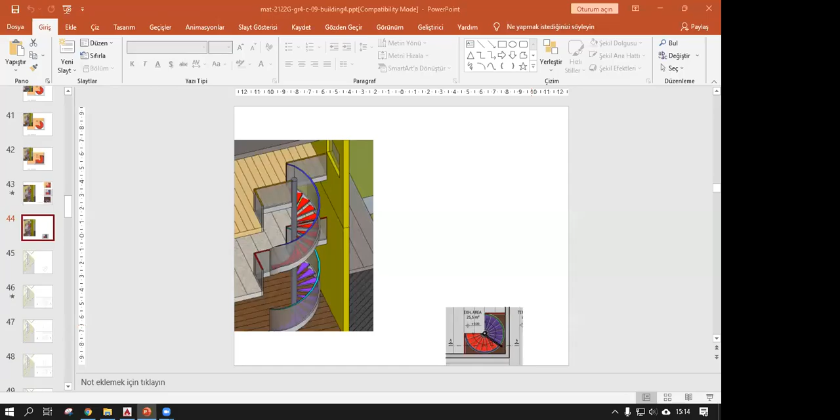Now let's prepare a section, and see how we can draw the section of these two steps. First, we need to determine the right position for our section.

As you know from our previous courses, this line here represents the vertical cutting plane, and we know that it should be positioned like this. I should cut through these floors, and here I should cut through these.

As you can see here, I'm cutting through the floor at each level, and I'm cutting through the handrail and guardrail here. After that I will cut through this blue handrail, green handrail, and I will cut through these purple steps and red steps at this position. Then I will cut through the blue handrail and green handrail again.

One more time, I will continue cutting through the floor area here, and I will cut through the wall, the outside floor, and the earth. This is the position of our cutting plane, the vertical cutting plane, and we will look in this direction.

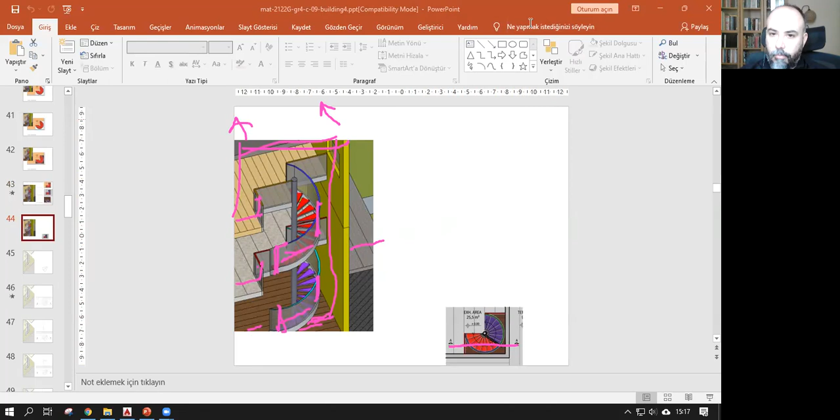This time it should be positioned vertically on your desk like this. This is an A3 drawing paper, and you should fix it so that you will have the space to transfer everything that is being cut from your plans and do the drawing here.

However, since we are going to do the 1/20 scale, I think that, if I'm not mistaken, this upper edge of the A4, A3 paper will not be enough for this scale.

So maybe if you have another A4 drawing paper, a piece of drawing paper, you can add a little here so that you will be able to do the whole building with its roof and the basement floor. You will have this height because of that.

If you stop the video and do the fixing, you can replay it and draw it with me. It's very important for us to understand what we are cutting, and what we will see after that when we look towards this direction.

Everything here we need is on this plan. So basically we are going to just transfer these intersections to find the cut surfaces, and then when we look towards this direction, we will transfer the corners that we are going to see.

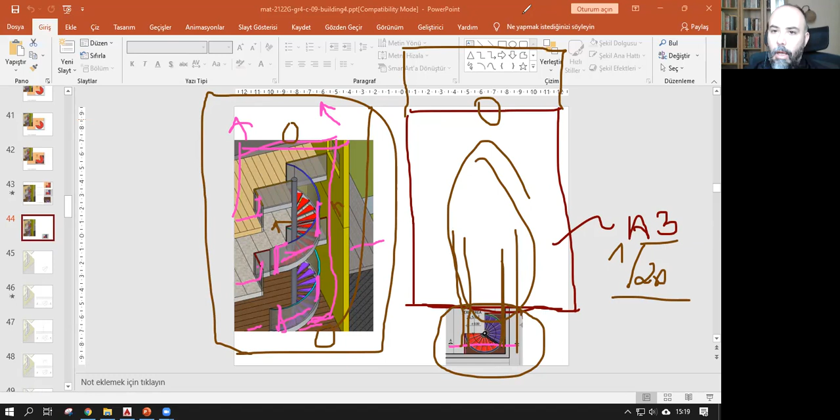Let's do a little preview first before we start drawing. Let's say that this is the first stairs that connects the basement floor with the ground floor, and we have, as you know, 15 risers.

Each riser has an 18 centimeter riser height. So let's take these two steps - this is the third step, and this is the fourth step in the plan.

And when we look down, this is the surface of the minus 2.70 basement floor area. When we cut through here, we should understand what we are cutting through.

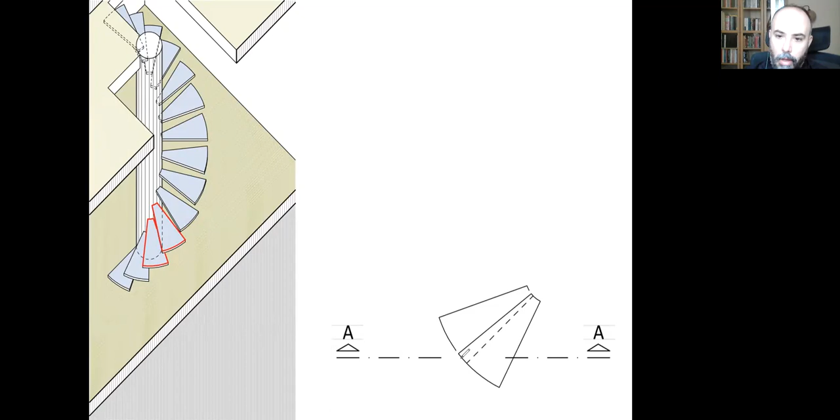Sorry, I made it wrong. We are cutting through this portion of the third step and this portion of the fourth step, and also we are cutting through the basement floor because of the position of the cutting plane, and we are going to look in this direction.

So let's first draw what we cut, and then we can draw what we see. This is the cut surface of the basement floor, at the minus 2.70 level.

To find the height of the third step, I need to measure 1, 2, 3 times 18 centimeters. This is the portion of the intersection of the cutting section line with the surface of the third step. As you can see here, just this corner is being cut on the plan.

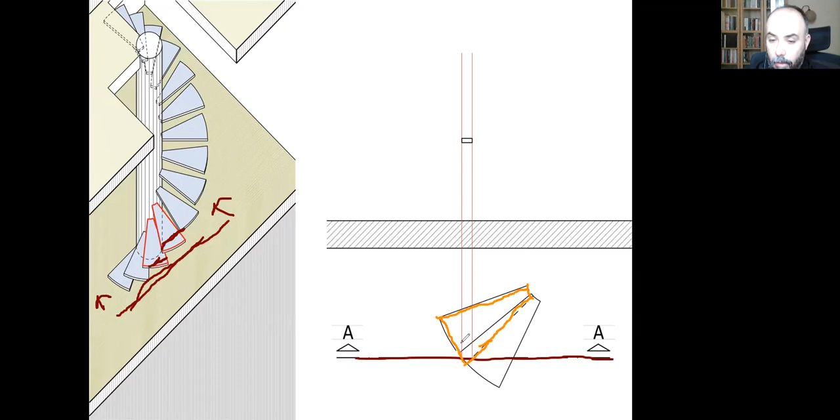This part is the portion being cut here. And when I transfer the

Edges of the cut surfaces, I need to measure 3 times 18 centimeters, because that's the height of this third step. This is the height of the first step, 18 centimeters. The height of the second step, another 18 centimeters. To find the height of the third step, the cut step, I need to measure 3 times 18 centimeters here, and that's the height of the third step.

As you can see, it has a thickness, approximately 2 centimeters, or we can say 3 centimeters. I draw it with thick and dark lines, and I do the hatch, as you can see. That's the cut surface of the third step.

I'm going to do the same to find the cut surface of the fourth step. I can see the upper surface of the fourth step on my plan, and its intersection with the section line will represent the cut surface of the fourth step. I need to measure another 18 centimeters to find its height. When I transfer the intersection of the top view and the section line to my section drawing and measure another 18 centimeters, I will find the cut surface of the fourth step, as you can see.

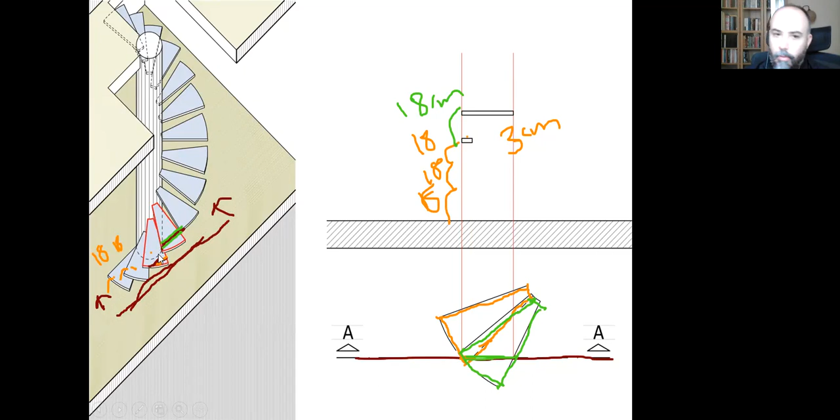And that's all the cut surfaces.

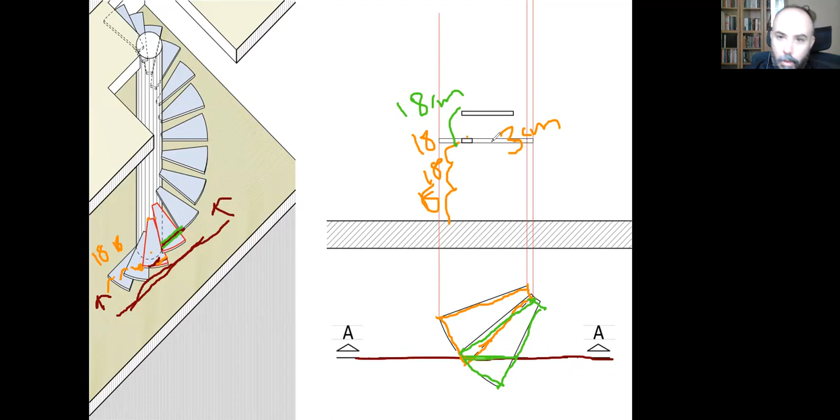If I just concentrate on these two steps and ignore the rest, let's find out what we can see now. When I look forward, I will be able to see this corner of the third step, this corner, and this one. As you can see, it's been blocked.

I'm going to get rid of these things. As you can see here, this corner is being blocked by the surface here, so it's indicated with dashed lines. It's this corner here, that one. This is that corner, which I can see when I look. I will be able to see this part of the step.

This is the section line position, and I will be able to see that side of the step, this side of the step, and this corner here will be at my back. So I can again use dashed lines to indicate that edge of the step, and as you can see here, it's been indicated with dashed lines.

I will do the same for the fourth step as well. Again, I'm going to find out what I can see when I cut through here like this, the intersection of the fourth step with the section line. I will be able to see this corner of the step, this small portion like this, and that corner and this side of the step, that one. And this corner here is blocked.

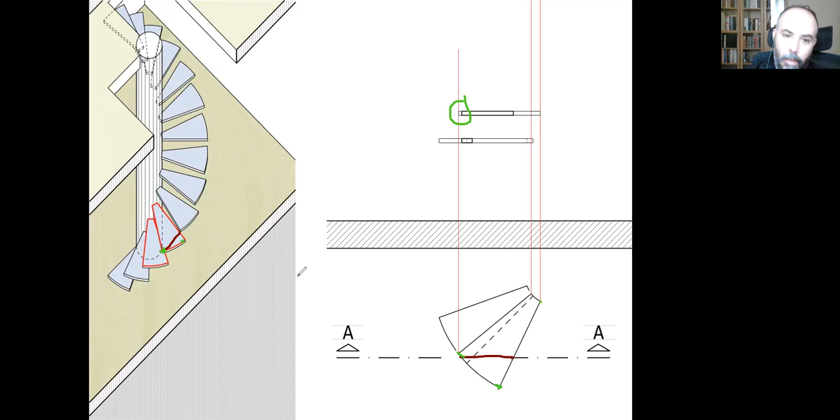So I'm going to use dashed lines here, as you can see. This corner will be at my back, so again I'm going to use dashed lines to indicate that corner as well. So let's find out. Yeah, that's the dashed line at the back, and these are the cut surfaces.

And that's all. I'm going to do that for every step which intersects with this section line to find the cut surfaces. When I look forward, I will find out what I can see and transfer all these points one by one to make my drawing. So let's do that together.

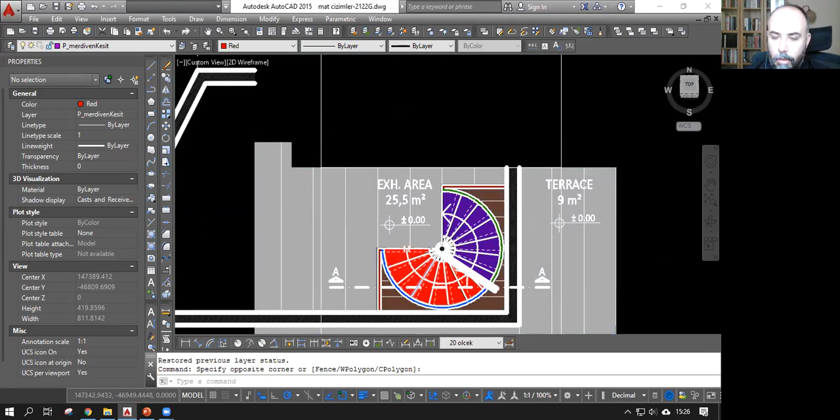This is my workspace. As I told you before, I want you to do the same with your hand. You need to transfer these points with me by using your tools. First of all, I'm going to start with the section, and I will find the positions of the floors. That's the first thing I'm going to do.

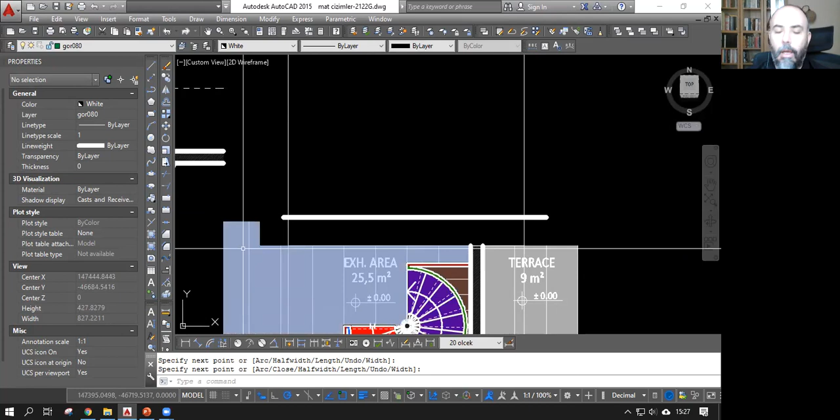Since it's the section, I will need thick and black lines here. So I'm going to find this layer. Let's say that this is the upper surface of the basement floor. I will just draw a line at the bottom of my A3 drawing paper, and give its thickness, which is 20 centimeters, and that's the basement floor. After that, I can transfer the position of the wall here, so I will know that the basement floor ends here, and the rest will be the earth, as you can see.

And that's the position of our wall, basement floor wall. And I need to measure 2 meters 70 centimeters in reality to find out the position of the ground floor. That's the level of the ground floor.

However, now I need to transfer its position because, as you know, our ground floor has this void. So I will be cutting through the ground floor till here, and the rest will be the void. And then after that, I will cut through the wall here. So in order to find out its position, this is what I need to do.

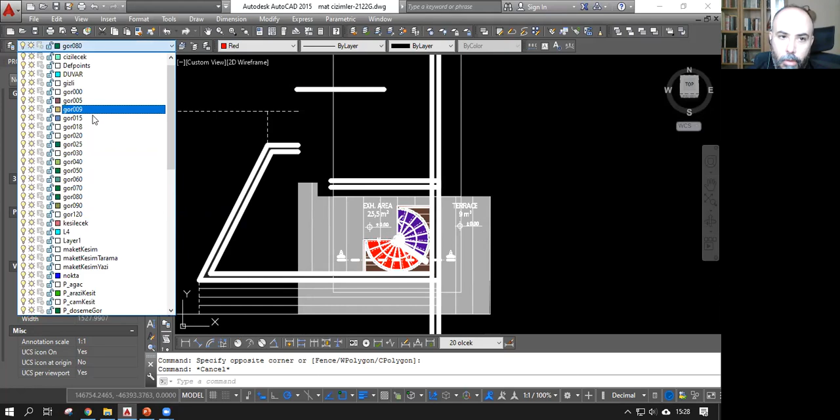I need to transfer the intersection of this handrail, and that's the end of my ground floor. And I'm going to draw a 20 centimeter thickness for the cut surface here. That's the ground floor.

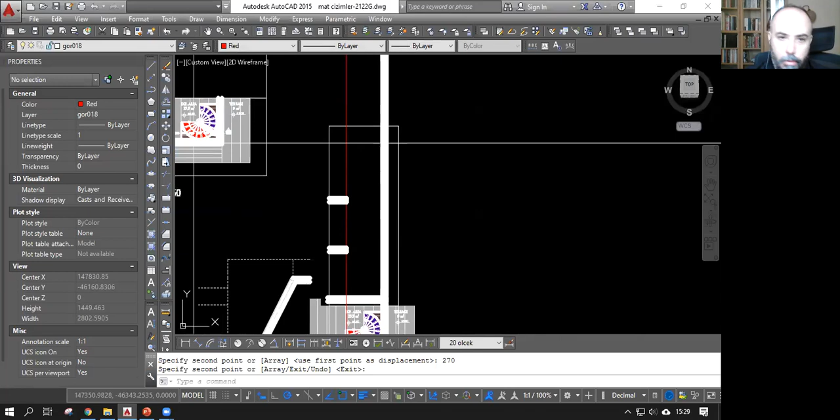I know that at the same level, at the same position, and above that 2 meters 70 centimeters, I will have the first floor, and above that I will have the roof area. You can use your previous exercise to find the position of the roof there.

I will just look at my previous drawing here and take the same level here. It's approximately this much. So I'm going to use my drawing. That's the position of the roof.

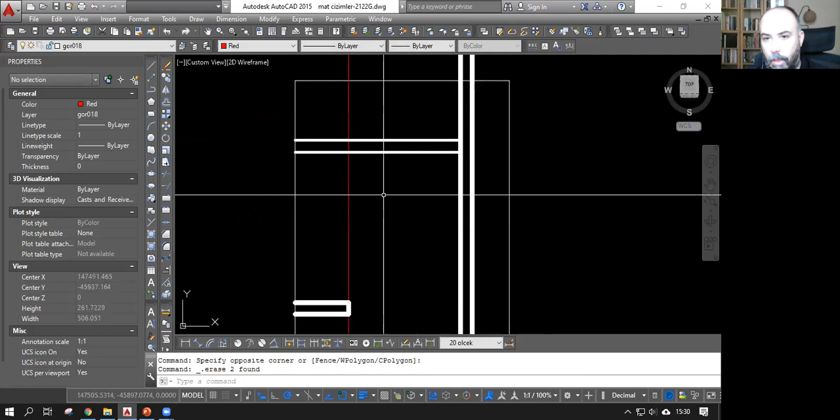Let's assume, and as you can remember, it finishes here. The cut surface of the roof finishes here, and the rest will be the wall, roof parapet. So I can draw the wall here. It starts from the basement and it raises up to the roof, and after that it's just 40 more centimeters, and it ends here.

And I can have little squares here to indicate the portion of the floor. Here we cannot see there, but we should know that the floor is, first you do the floors, and then after the floors in each level you will do the walls over the floors. So it's not that important, but you just need to know that.

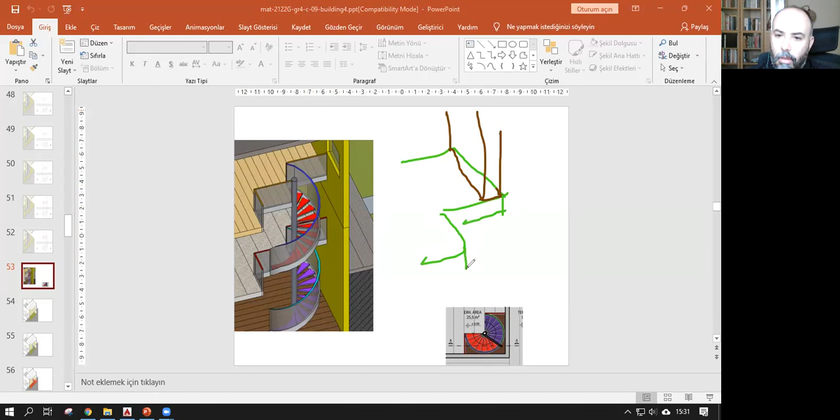All. When you cut through and you have a section, you will cut through the floor as well. So that's the reason why I draw these two squares. These are the floors, and we can do the wall separately.

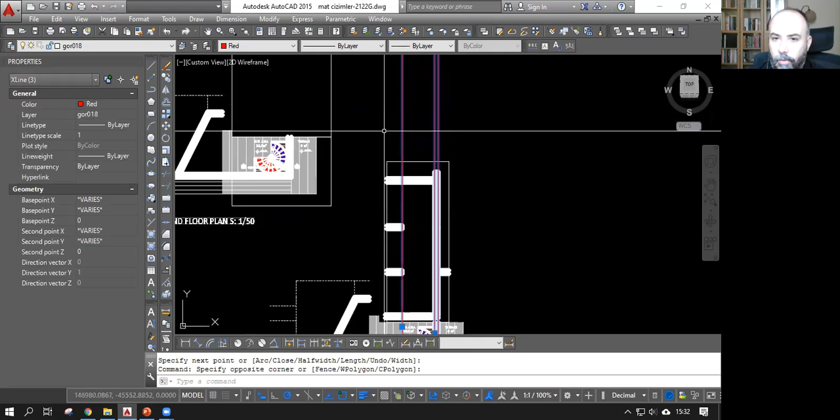This is the wall for the basement floor, the wall for the ground floor, the wall for the first floor, and after that I can draw the terrace area, the outside terrace area, and this is just the earth in the basement floor. So these are the floors and the roof, and after that I will cut through the red steps.

So first of all, I will need to find out the position. Let me do this first.

I should know that this is a continuous line, and their intersection will indicate the cut step. So when I position my section line here, I will be cutting through not the first, not the second, but the third step, like we did previously in the PowerPoint.

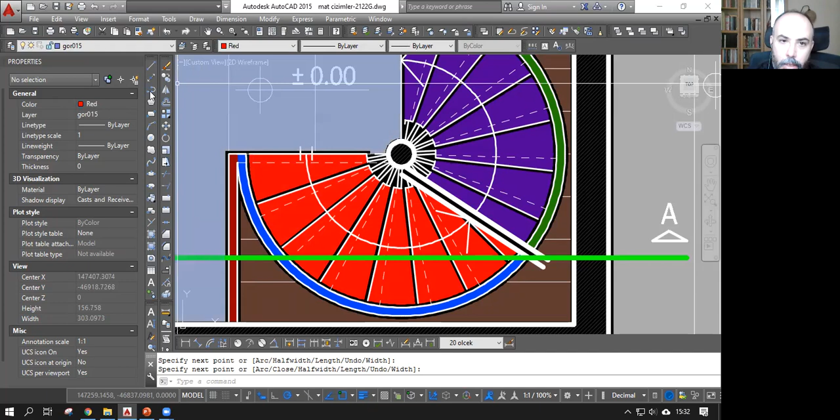So this is what I'm going to do. I will transfer the position of this cut step, and this one here, that's the end. That's the beginning of the step, and that's the end of the step, the cut step. And I need to find its height.

After the ±0.00 level, I will measure 1, 2, 3, 18 centimeters to find its position. So I'm going to draw them in red line. I will measure first 18 centimeters, second 18 centimeters, and the third one will be the position of the third cut step. So after doing that, I'm going to draw its thickness.

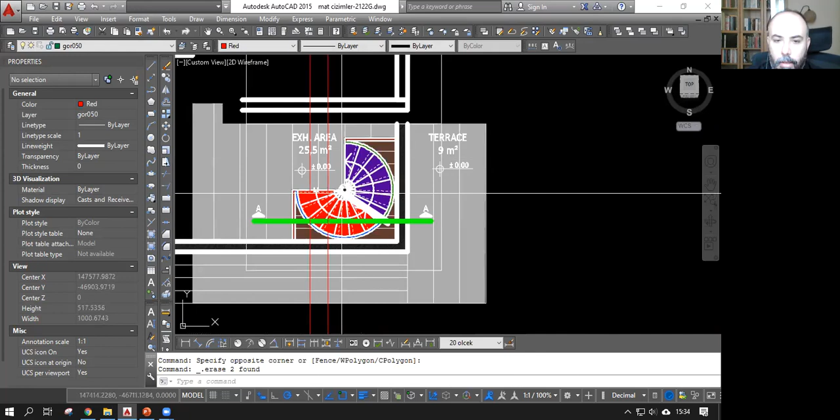I will just have a 3 centimeter thickness for the steps. So this is the third step that I cut through the red stairs, and after that I will cut, as you can see here, I am cutting the fourth step.

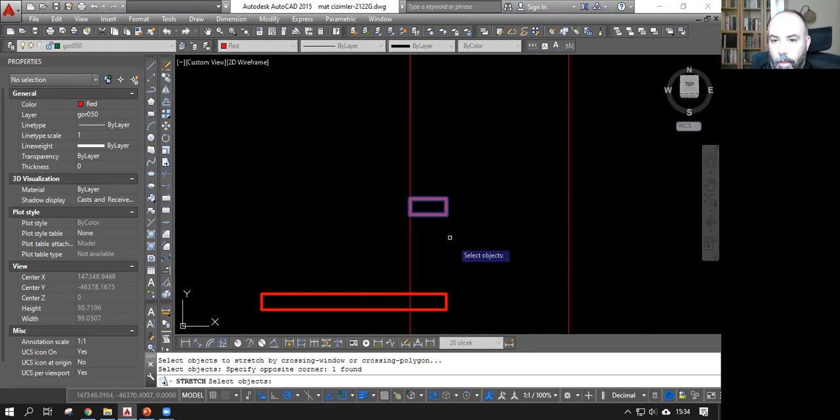So I will transfer the intersection of the fourth step with the section line here. This is the beginning of the cut surface, and this is the end of the cut surface. So I will measure another 18 centimeters, and I will place my lines to start and finish of the cut surface.

After that, I will cut through. I'm going to change its color because I cannot see it. Now I will cut through the fifth step. It ends here and it starts here.

I will again measure another 18 centimeters to find its height. That's where it ends. The cut surface ends here and where it starts.

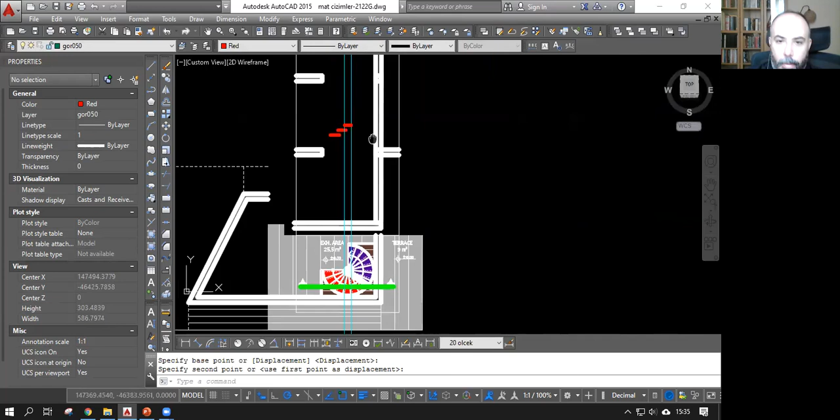And after this, I will cut through the sixth step. Again, I need to find where it starts and where it ends. This is its start point, and this is its end point.

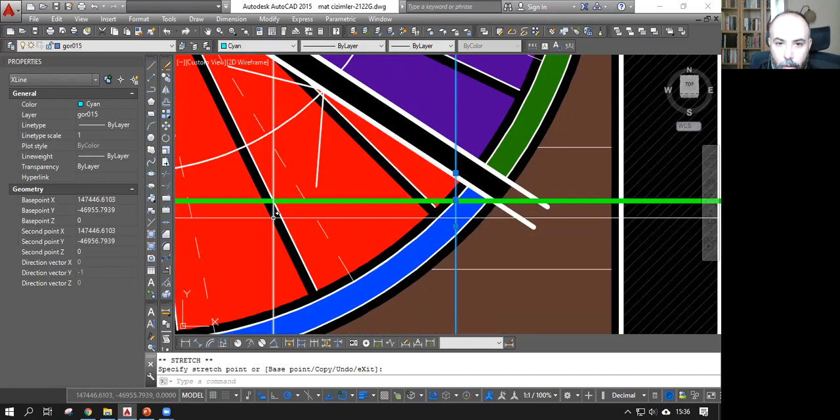And I will cut through another step here, approximately here, and it starts here. So I will transfer its position as well. And the last step, it's only a small portion. That's the last step that I cut. And the rest I will just see, so I'm going to draw it as well.

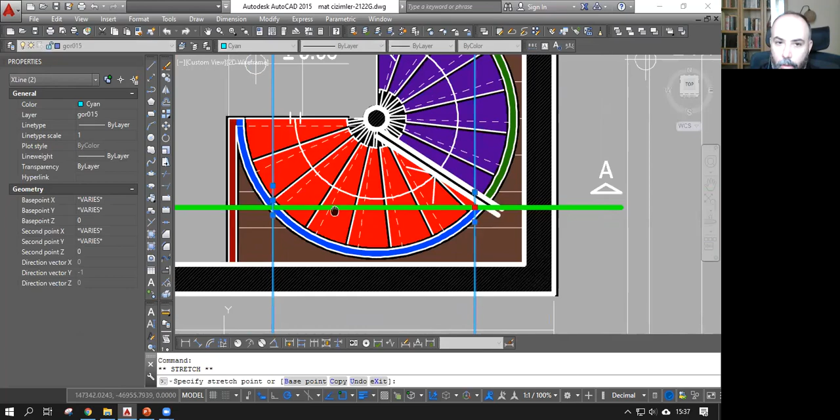Okay, now I can find out the steps, the seen surfaces of the steps, and I can start again. I can turn back to my third step, and I will find out the seen corners. I will see that corner, this corner here. I will see this one as well, and I will see that corner. So there are three corners.

This one will be blocked, so I will indicate it with dashed lines. And I can see this corner, that corner, and there will be another corner at the back, so again it will be indicated with dashed lines. I am going to use a thinner line this time, and I will still indicate them with red color, so it will be easier for us to separate the steps. I will see this portion here, I will see that portion here, and this line will be, as I told you before, with dashed lines.

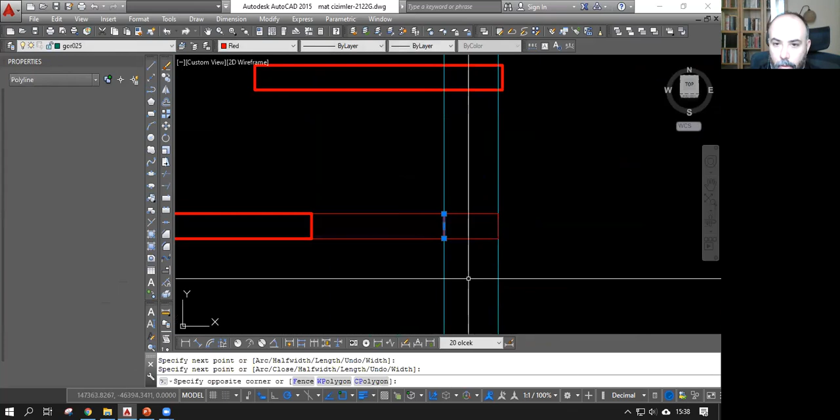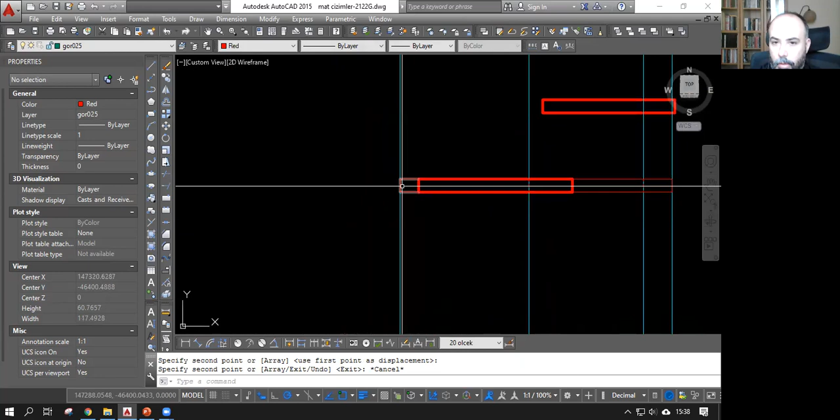And let's try this one. Okay, it's too big. Yeah, that's the line that I can see, and there is only one corner left, that's this corner here at the back, or the third step. And since I cannot see it, again I need to do a dashed line for that corner as well. Let's change its line type scale, and I'm going to copy this here. So that's the third step, the cut surface, the seen surface, and the unseen edges. I will do this for other steps.

Let's do one for the fourth step, and after that I'm going to pause the video and finish the rest. And I want you to do the same with your hand drawing. This is the surface that I cannot see, it's at the back. This is the corner that I cannot see, it's been blocked, and this is the corner that I can see as well. So that's my fourth step.

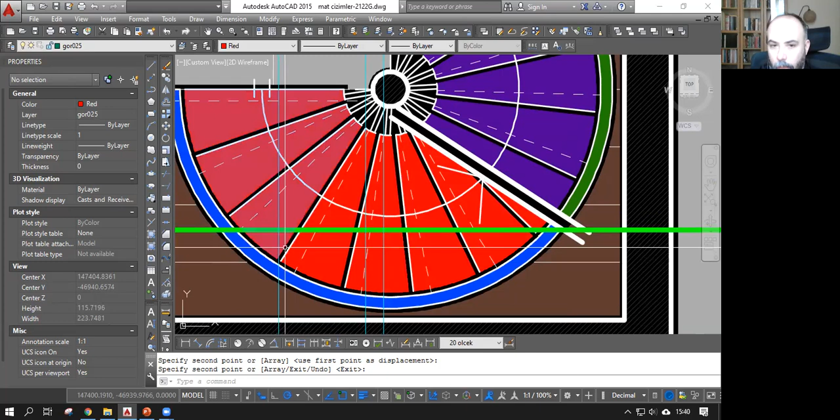I will be looking at this side, all the steps, and since it's been blocked, I will do a dashed line. This part again is at the back, so it will be dashed line, and there will be one more line, again at the back here, so I will create dashed lines for this part. These are the dashed lines as well, they are at the back. And I will keep going like this. Let's do one more time, and then I will stop the video.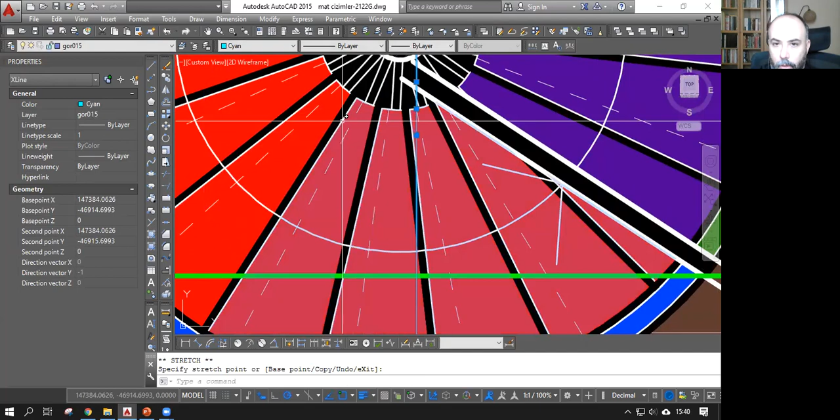This was the fourth step, and now I need to do the fifth step, which is here. So when I look towards this direction, I won't be able to see that corner and that corner because they will be both blocked. So I will just indicate them with dashed lines. This corner here and this one here, they will be both in dashed lines.

So I'm going to copy this line here, here, and how about the other corners at the back? Since they are at my back, I won't be able to see them either, so they will be represented with dashed lines too. So I'm going to move this line to transfer its position to here. This is my fifth step.

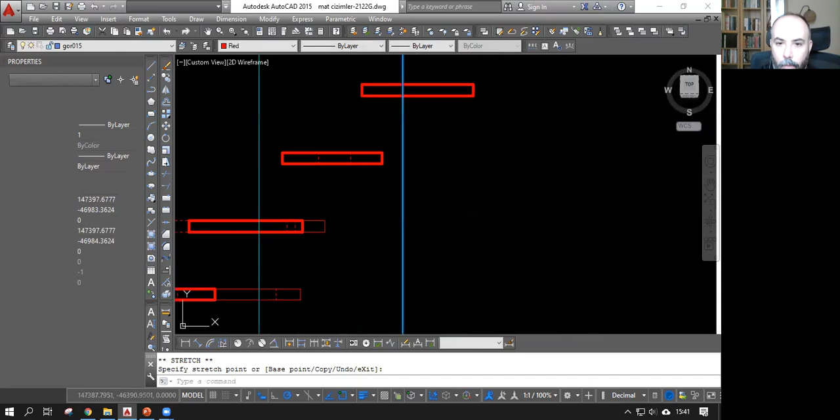Again, it will be just indicated with dashed lines like this, because they are at my back. And I will change lines here, here. Let's do the rest together. If you want, you can pause the video and keep going, keep drawing yourself.

This is our sixth step. When I look forward, I will be able to see this side. So I'm going to draw it first with continuous lines. This is the side of the sixth step that I can see. And the rest, let's check the rest. I won't be able to see this corner because of its position.

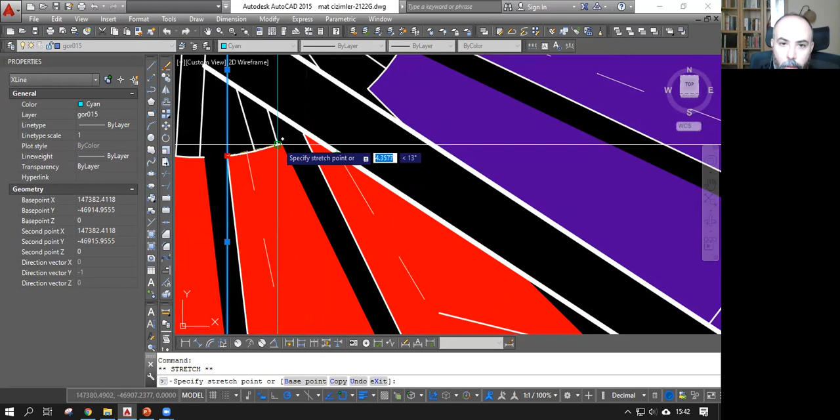Intersection here, this is the side that I cannot see, so I will indicate it with dashed lines like I did previously. This is the position of that corner. How about what happens at my back? I am going to check that. I cannot see that, that should again be indicated with dashed lines. It will be at my back. That corner will be at my back.

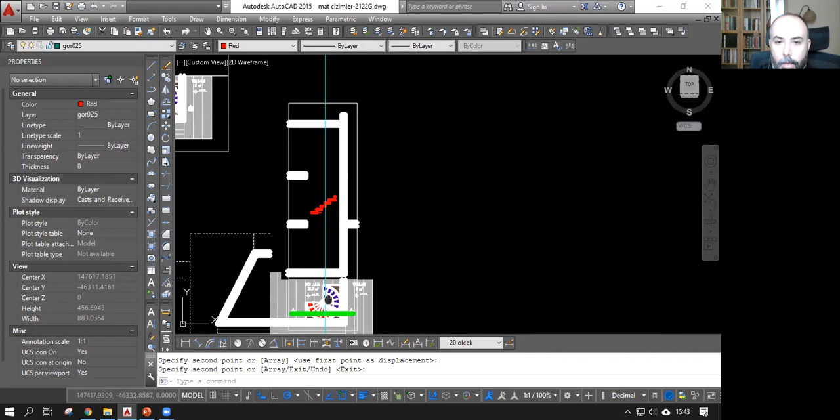And there is one more corner, I should represent that one. Again, it will be at my back, so I won't be able to see it. So I'm going to represent the whole edges with dashed lines.

Okay, this is the sixth step. Let's move on to the seventh step. That's the cut surface of the seventh step. I cannot see that corner at the back, so I'm going to indicate it with dashed lines here.

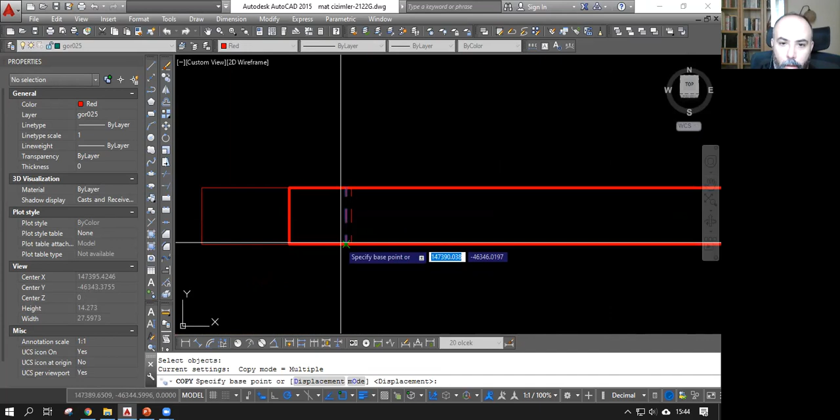And how about when I look forward? I will be able to see that corner and this surface, so it will be represented with continuous lines, as you can see here.

And how about the rest of the steps? Approximately it will be somewhere here, I'm guessing, at this position. That's again something I cannot see - it's been blocked by the cut surface, or seen surface this time, so I will represent it with dashed lines.

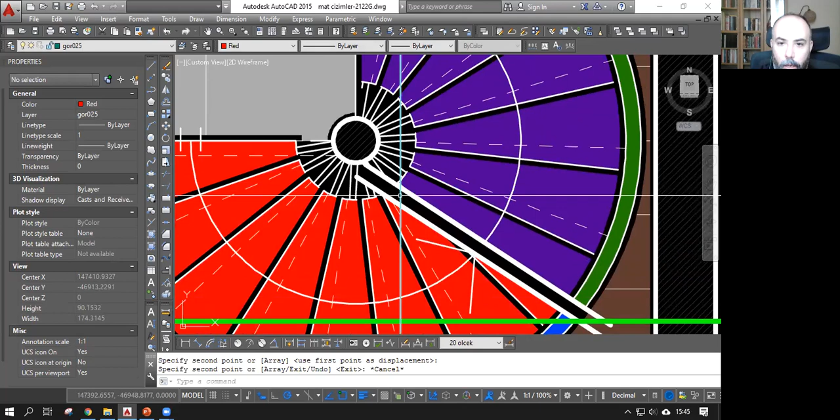And that's the surface. How about what I can see at the back? I will find its position somewhere here - that's my guess, at least. So I'm going to draw these with dashed lines as well, since these are the unseen surfaces.

And this is the last step that I can see. Approximately its position will be somewhere over here, I'm guessing. I'm trying to find its intersection.

Or instead of doing this, I can of course use the first floor plan. It will be easier for me to find the exact position, so I'm going to do that. I will stop the video for a moment.

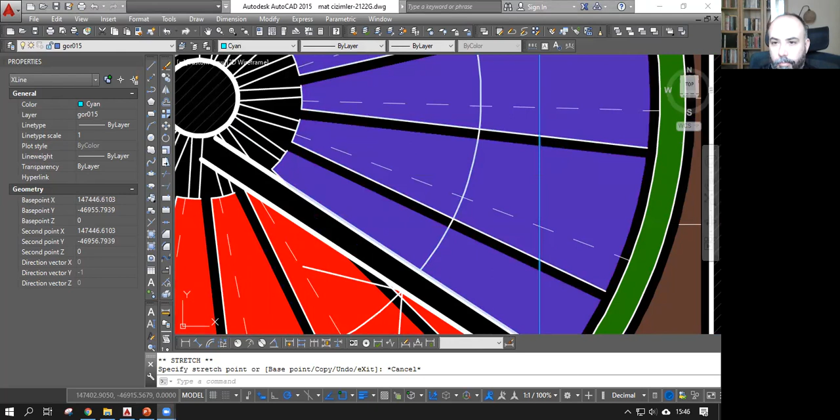So these are the cut and seen surfaces of the third, fourth, fifth, sixth, seventh, and eighth steps. These are the steps that intersect with the section line, meaning these surfaces are being cut and the rest are being seen, as you can see here.

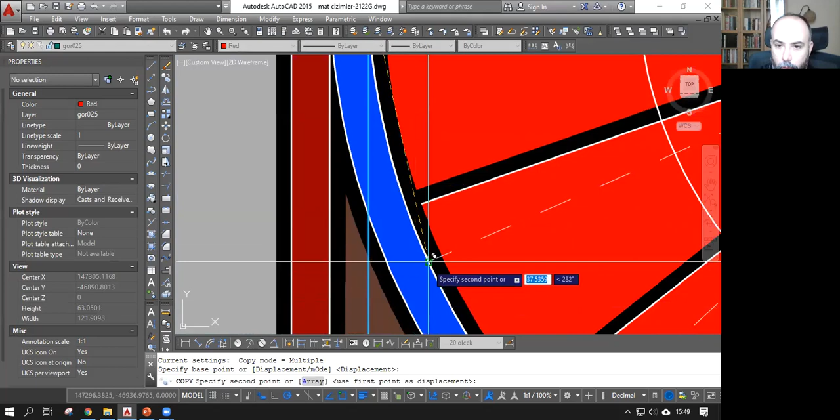Now I will draw the seen steps. I can start with the first step. When I cut through here and look in this direction, I will see this corner, and I will see that corner and this corner, and that will be the unseen corner, so it will be represented with dashed lines.

So I will measure 18 centimeters for its height, 3 centimeters for its thickness. These are the edges that I can see when I look towards that direction. And that corner, the only corner here, will be the unseen corner, which I can represent with dashed lines here. So this is the first step that I can see.

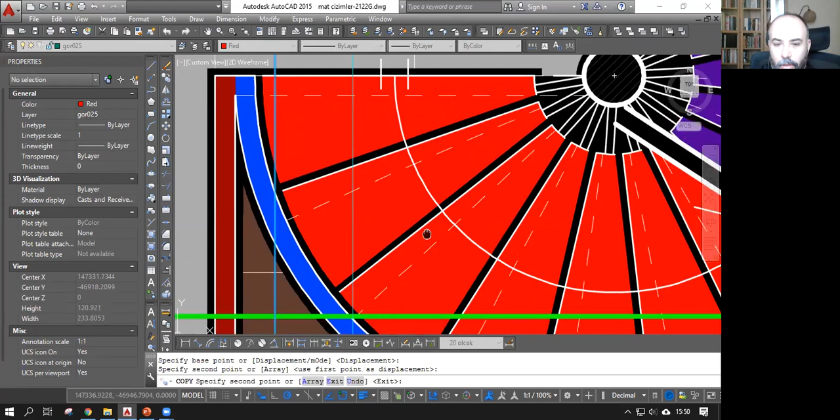And let's do the second one. It's again the step that I can see. When I look towards this direction, I will see that corner, and I will see this corner here - it's so little, I missed that, there was a very little section part, but I forgot that, so maybe I can do it now. This part is being cut.

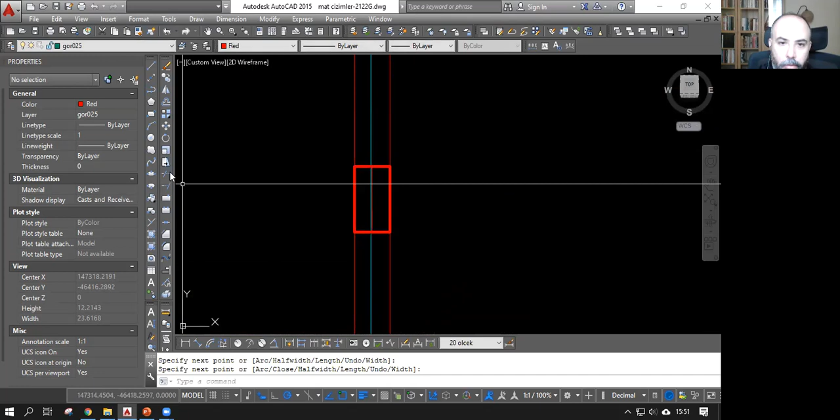First I'm going to find its height - it's 18 centimeters. This is its cut surface, so little, so narrow. And there is one hidden line at the center here, which should be represented with dashed lines, with this line here.

And when I look at that direction, I will see that corner, and I will see these corners as well. So yeah, that's the first, second, and I'm going to draw the rest now.

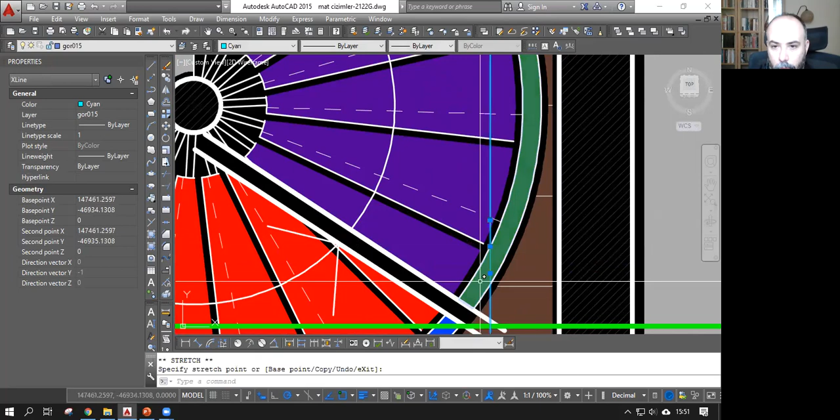That's the last step that I cut. So I will continue with this step that I can see. When I look at this direction, I am going to see this corner and that corner here, and this corner as well. That corner will be blocked, so it will be represented with dashed lines.

So I'm going to find its position first, and after that... this is the corner that is being blocked. So this is the step that I can see.

I will do one more step here. When I look through, I will see the corner of this step, and it's this corner, and its back corner here - it will be blocked - and this one here. So these three are the corners that I can see, and the fourth one will be the blocked corner.

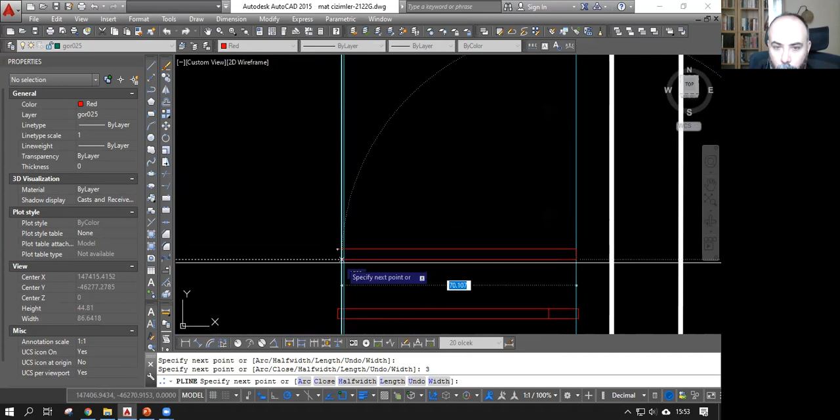And the only corner left is the blocked one. First I'm going to find its position. Now it's here, yeah, this one here. So it will be represented with dashed lines. I will copy this line over here.

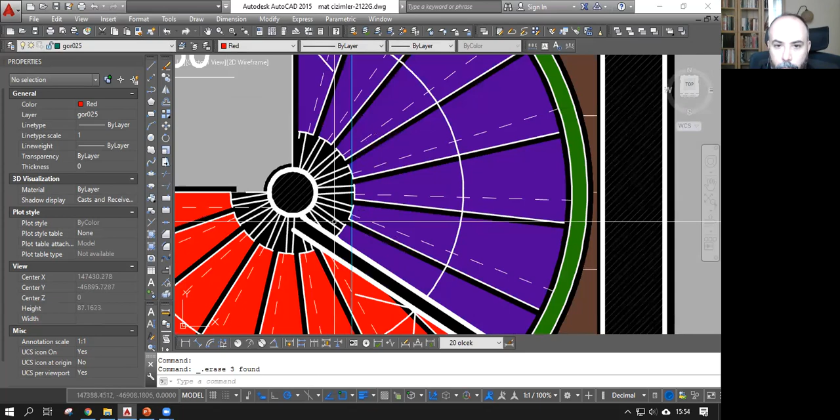After that, I will do one more step. When I look towards here, I will see that corner of this step. I'm at this step now, and I will see that corner, and I will look at that corner, and this corner will be hidden. So I'm going to indicate it with dashed lines.

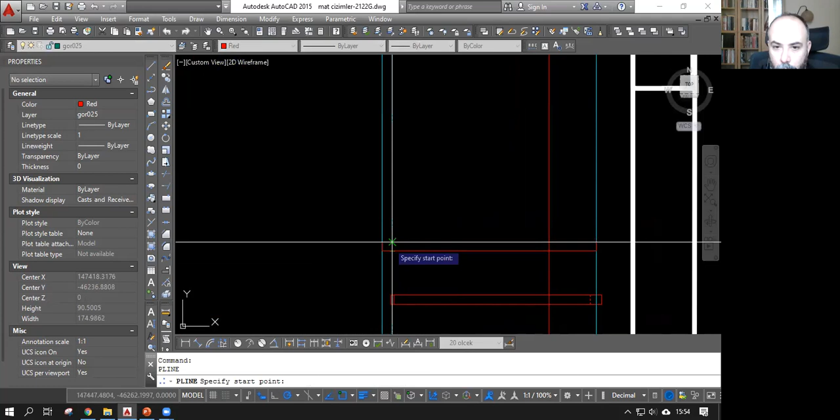So let me find its position one more time. 18 centimeters, so 3 for its thickness. And this is the corner that I can see, and this is the corner that I cannot see. So it will be indicated with dashed lines.

Moving on to another step. This time I'm here. I can see this step, this corner, and that corner, and this one will be blocked. So I will change its color to red so that I won't be mistaken. I found its height. So let me do one more time.

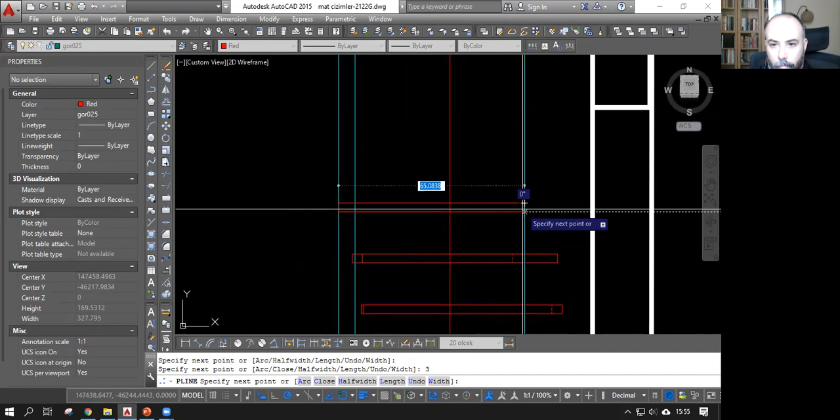And this is the corner that I can see. That's the corner that I cannot see. Let's move on to the next step. We have 2 more steps left. So I will complete them, and we can see the result.

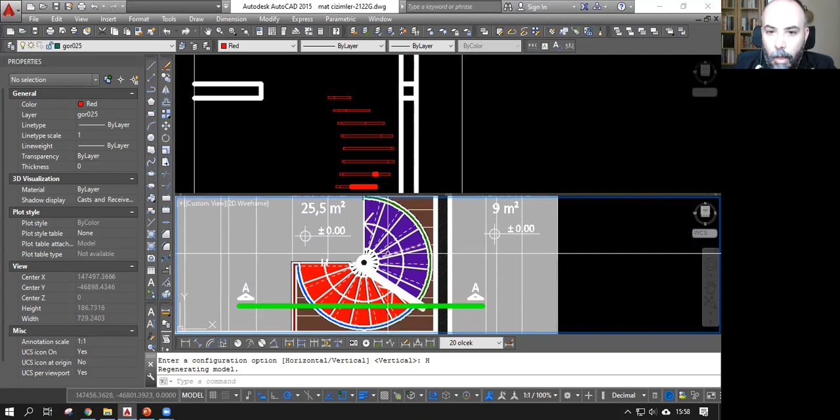Let's check the result. These are the steps that I can see. That's my last step here. And when I look towards this direction, I can see this edge and this edge here, and that's all. And that's where the first floor is.

Now when I look towards this direction, I can see the middle column, and it starts from the upper surface of the ground floor, and it raises up to the roof. So this is its view.

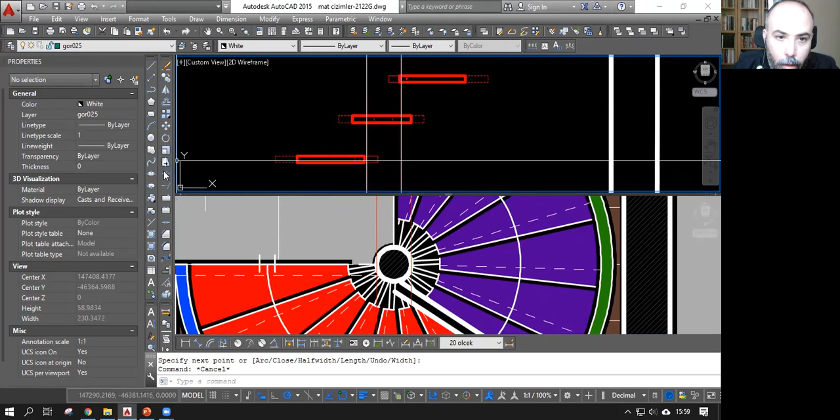Here I'm going to clean them because these are the lines that are being blocked by the steps, and yeah, that's all. And since these are being blocked by the column itself, I will make them dashed instead of these continuous lines.

In this part, these parts should be dashed, and I will complete these sticks, or these connection parts let's say, here, and I will show you how it looks.

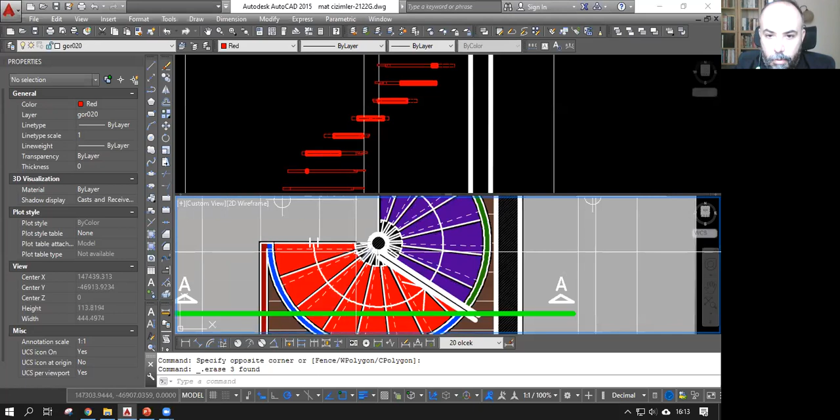As you can see here, this first step is being connected with this narrow connection part to the middle column here. Please do not forget, this is how I designed it. It's not the only way.

You shouldn't memorize the drawing. First, you need to find a proper solution. You need to do the design yourself and then do the drawing by figuring out what is being cut and what is being seen.

And the other part here, the third step, as you can see, it's being connected to the middle column here. The fourth step, here the connection part is being blocked, so it's just hidden there. This part that I can see, and the rest is blocked here, and it goes like that. And after this part, it's being blocked by the middle column, and that's the last step.

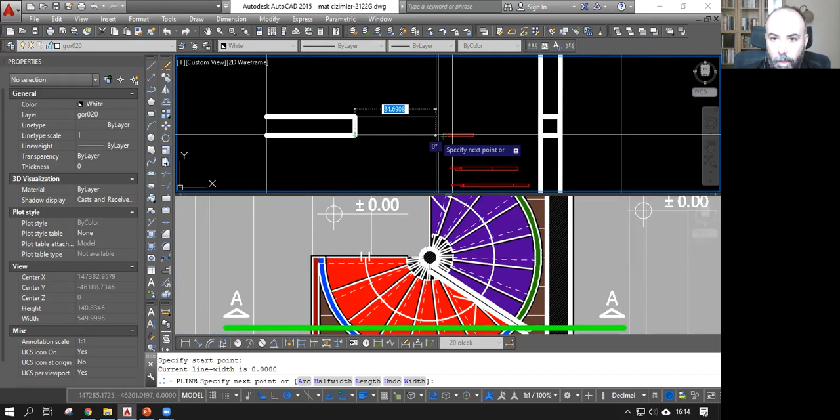So now I need to draw the seen surface of the ground floor and the first floor. As you can see here, this part of the floor is being seen, so I can draw it like this. It again has a 20 centimeter thickness here, and it ends at this part behind the column. So it's here, I can do it with dashed lines.

That's where the floor ends behind the column here. Sorry, I couldn't, there's a problem with my mouse, and sometimes it snaps somewhere odd. And again, these will be in dashed lines because it's been blocked by the column there.

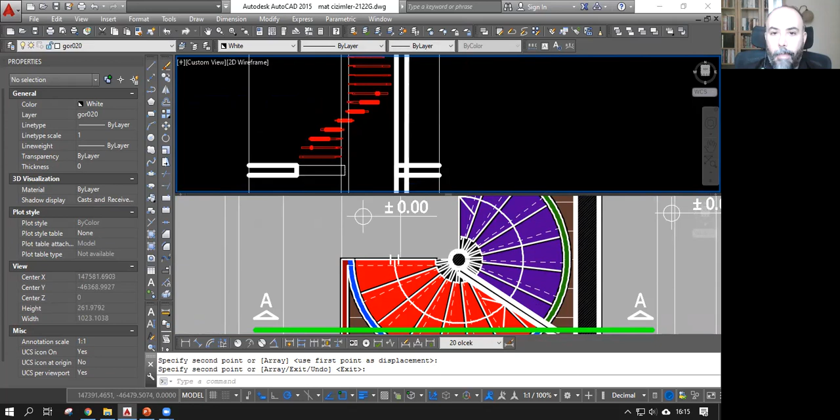And I am going to change its layer into this one. Yeah, okay, that's the floor part, the seen part of the floor. And again, it's the same for the first floor as well, sorry, the ground floor as well. It's something like this. And now, since I drew everything about the steps, now I can draw the handrails.

And as you can see here, this part of the handrail is being cut. That horizontal part of the handrail, both here and here, it's being cut. So let's first draw that.

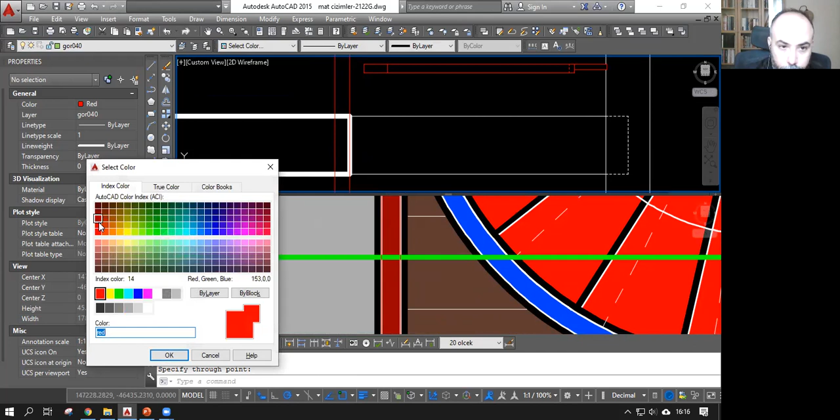In order to draw first, I need to transfer its position to the section line here. As you can see, I will use a thick line because it's been cut, and I am going to use a dark red color to indicate the ground floor cut surface.

It's here, it has a 90 centimeter height, and it's just a transparent surface, like a transparent wall. So it's here, and above that, the brown part, the brown one is being cut as well. So I will use that color to indicate.

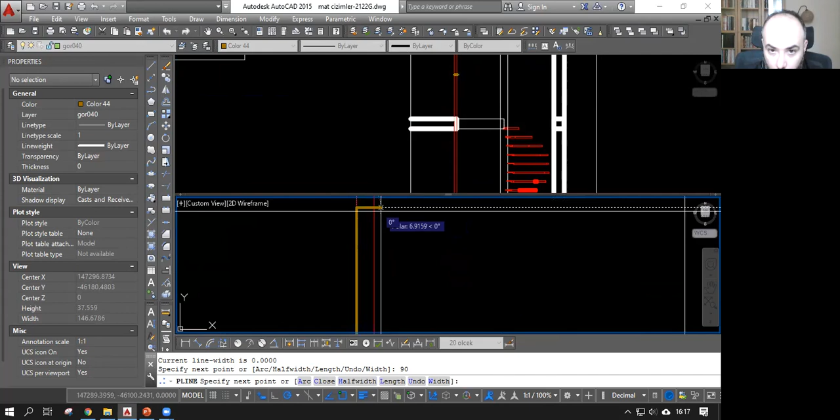Sorry, first I need to find it here. It's this color, color 44. I will draw that with that color. Again, it's 90 centimeters high, and these are the surfaces that are being cut.

Now I can draw the other cut surfaces, the blue one, which is being cut in two different places, one here and one here, and their heights are different. So in order to find its position, first I'm going to transfer its intersection with the section line here. The first position is here, and I'm going to find the step here—that's the 1, 2, 3, third step.

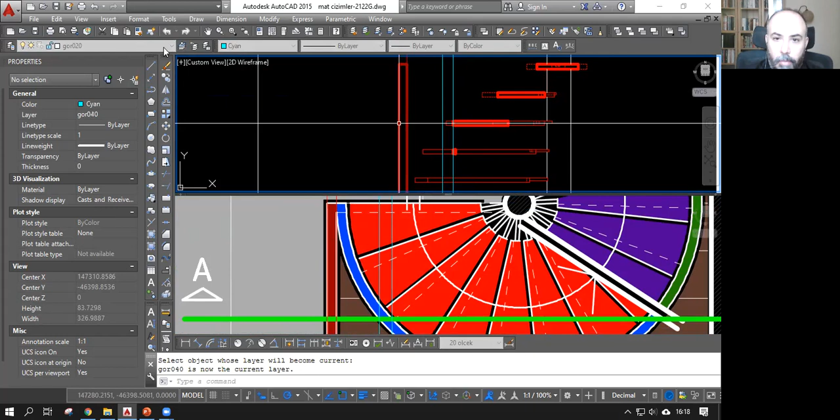So that's where it gets cut. I'm going to measure 90 centimeters from that step, but this time I'll do the drawing in dark blue color so we can be able to read it. So this is how it looks like when it's being cut. I just measured 90 centimeters starting from the upper surface of this third step, and that's all I did.

So this part is again being blocked by the handrail this time, so I'm going to turn it into dashed lines. That's the first part where this blue handrail gets cut.

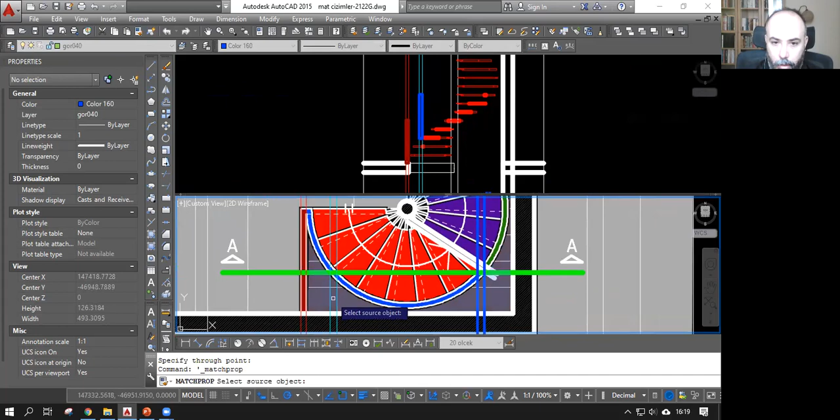The second part is here. It's a little bit higher, and again I'm going to find out which step it is connected to—it's this one here. So I will measure 90 centimeters starting from the upper surface of this step this time, and that's the cut surface of that handrail. Yes, that's it.

Now I can get rid of those lines, and as you can see, all these steps are being blocked by the handrail, so I will turn them into dashed lines. As you can see, I cut through the ground floor handrail, the dark red one, cut both the dark blue handrails at two different heights, and the first floor handrail.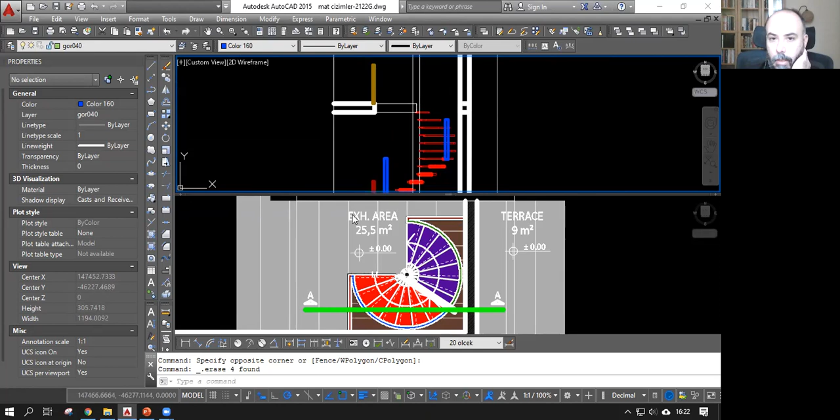And now I need to see the rest of the handrails, obviously. As you can see here, there is this horizontal part, both on the ground floor and on the first floor. So now I can maybe transfer its position and try to find out how I can see them when I look towards that direction. So that's the end of the handrail.

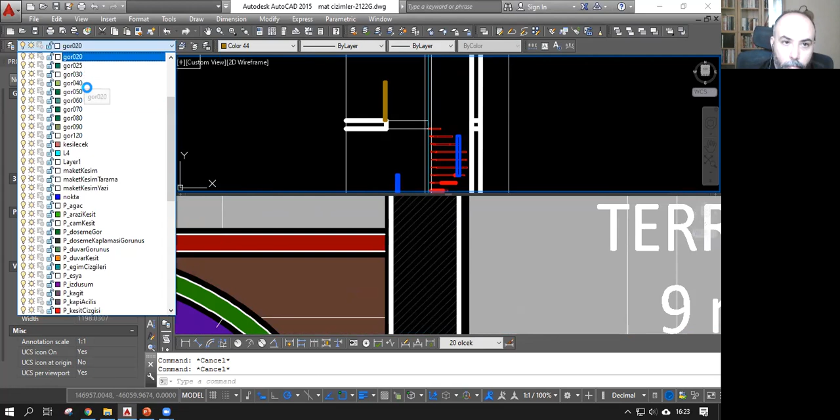In this height, I will change the layer so we can see it in a better way. At that height, it starts at the back of the column, and it ends where the wall is located. So that is its position.

That's here, and beneath that, again, the floor continues, and it ends there. So this is the floor, and that's the handrail behind the column—it should be in that color and this layer. Yeah, so that's the handrail at the back.

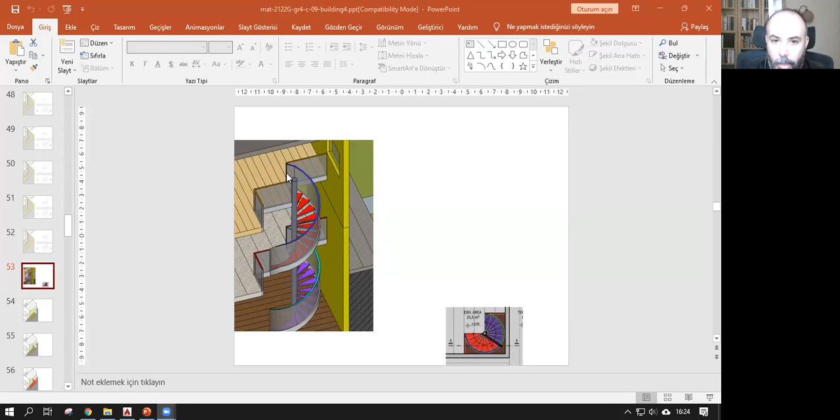This one, where the blue one meets there, and we should see this surface of that handrail as well. Again, it's on the first floor, it's here, and it ends where the column starts. So I am going to do a horizontal line—that's the surface of that handrail here. It ends where the column is, and that's the one at the back.

So maybe I can use a larger dashed line here so that we can all understand that that's a line at the back. And now we need to combine, we need to find out how this surface of the handrail, the blue handrail, and this one look like. That's here. There's a trick that we can use.

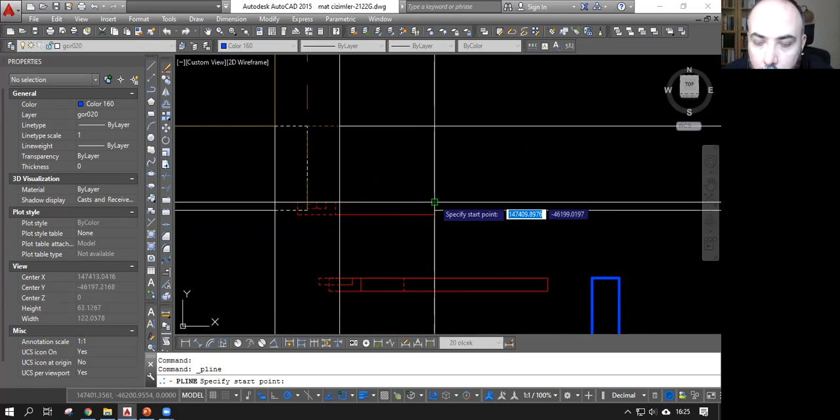We know that at the end of each of these steps, there is a 90 centimeter height. So we can use that to find how we can draw the handrail. This is what I'm going to do now. I will find a 90 centimeter height at these corners. I will just measure 90 centimeters and find this corner here, that point, at the end of each step.

And after that, I will just combine the ends of these points to create that curved line. So let me stop the video for a minute, and I will show you how I will do that.

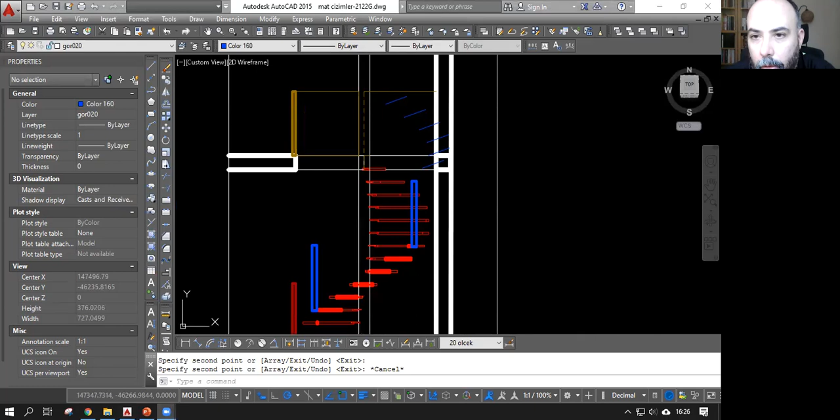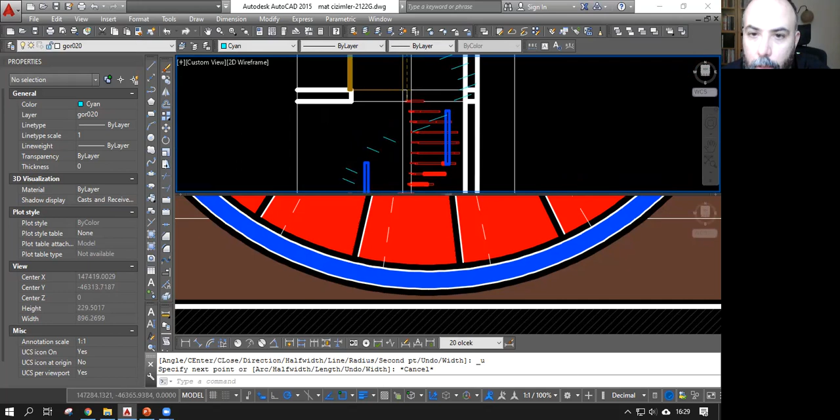As you can see, these are the 90 centimeter heights at the end of each step. So first I'm going to do that in this color, and then I'm going to change it one more time. I will try to create a curved line. If you are doing this by hand, you can use a curved ruler, and if you use AutoCAD, you can just do this with a spline, maybe. So I will combine all these dots to find the curved line.

Now I create all the necessary points and draw them with continuous lines. I'm going to convert them into splines, and since this is the cut surface, this will be the seen surface, and these lines will be dashed because it's just at the back. I'm going to convert them into splines and do the dashed lines, and we'll look at the result.

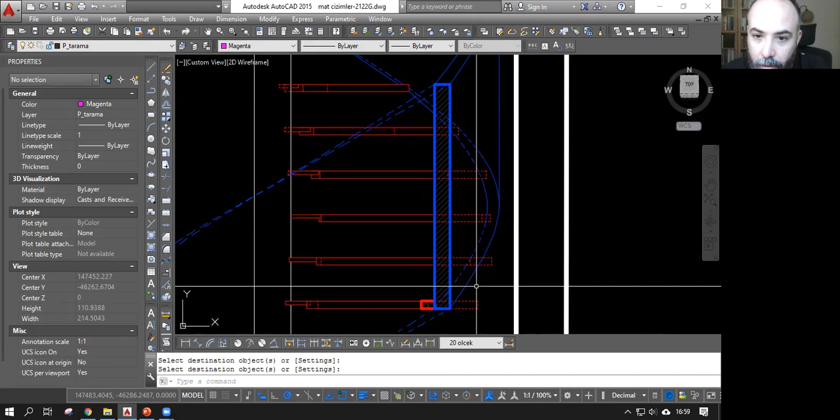At this point, this part is at the back, and these should be indicated with dashed lines as well. I just forgot them because they are being blocked by the handrail. So I just converted them.

Yeah, as you can see, the handrail comes from here. It's been cut there, and the rest is at my back, so it's indicated with dashed lines. Again, it's been cut, and I see it like this part, and after that, that's the cut part of the ground floor. Behind this, I need to do one more drawing like this one here, because there is this portion of the ground floor that I can look at.

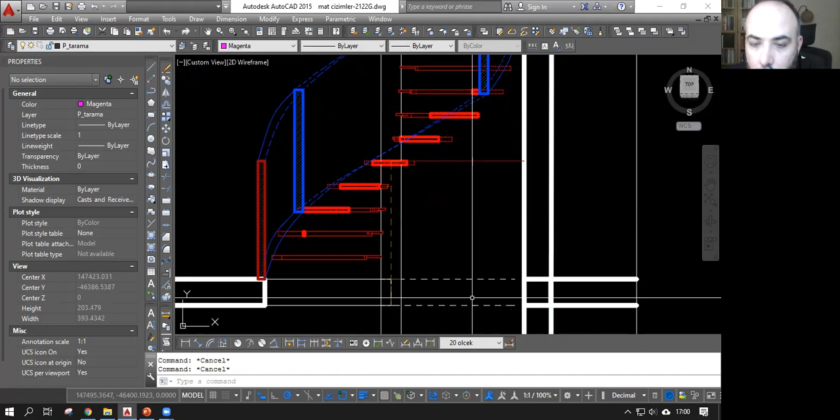I'm going to copy this, and this part should be the dark red, this one. That's the surface that I can see. Again, this should be in dark red, like this. It's behind the column there, and this is the surface that I can see here at the back.

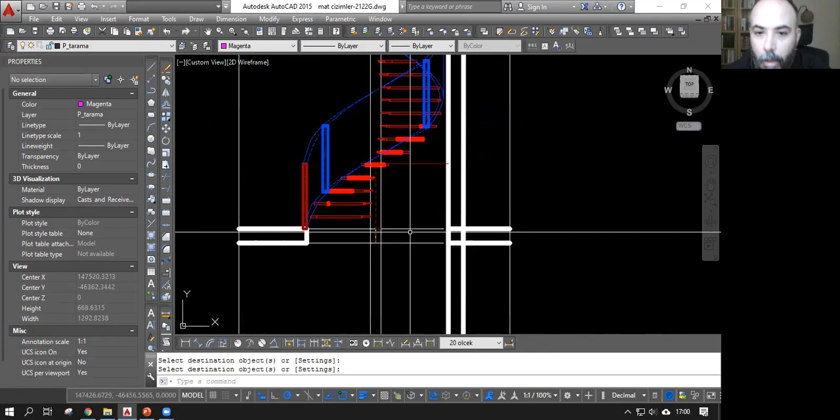And that's the surface that I can see there. It shouldn't be dashed lines. Yeah, that part. Okay, that's the side of the ground floor, that side.

I am going to copy the same stairs and change their colors because they are the exact same stairs. This means the vertical cutting plane will cut these purple steps, just like it cuts the red steps. I'm going to show you how it looks like. This is how it looks like.

As you can see here, these steps are being cut at that point, and we can see the handrail is dashed. It's behind our back, and again we can see it here, and it turns horizontally at this point, then it starts like this, and it ends here. This is the ground basement, the ground floor, and the first floor.

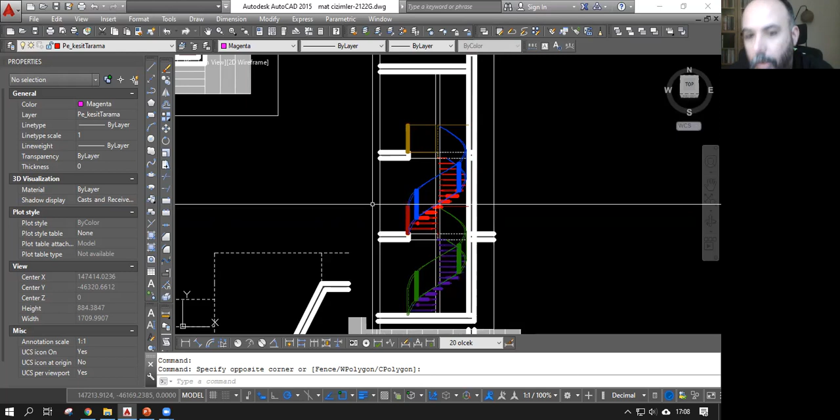I am not going to write the space names or the levels. I'm just going to convert this into a JPEG and show you how it looks like on a white surface. On white paper, we can see it like this. This is the plan, and this is the colored version.

I'm just trying to make you understand it a little better. Here is the stairs that connects the ground floor with the first floor, and this is the stairs that connects the basement floor with the ground floor.

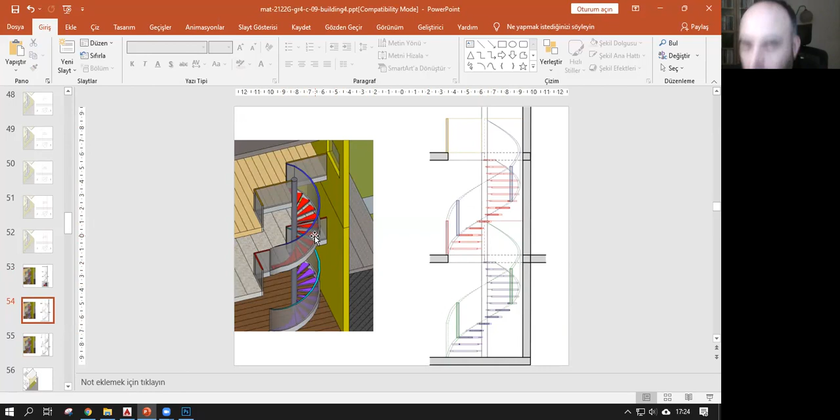When we get a little bit closer, it will look like this. However, we don't need to indicate them with these colors because these are not their original colors. These are things I just made up so I can explain it in a better way. This is how it's supposed to look like on a white paper.

Let me show you in a little bit more detail. This is these steps. You can easily recognize where it gets cut and which parts of the steps we can see, which parts of the handrail we can see, and what's behind us or what is being blocked by other objects.

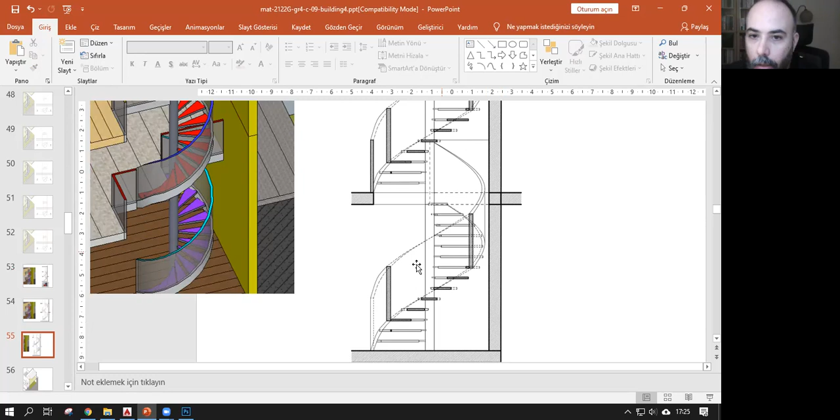This is the ground floor where it gets cut, and this is the first floor again where it gets cut. When we move down, we will be able to see the same here between the basement floor and the ground floor. This is how we can do it.

So I hope these will be useful for you. Whenever you have to design a spiral staircase, you'll be able to draw it easily and correctly. Yeah, that's all.